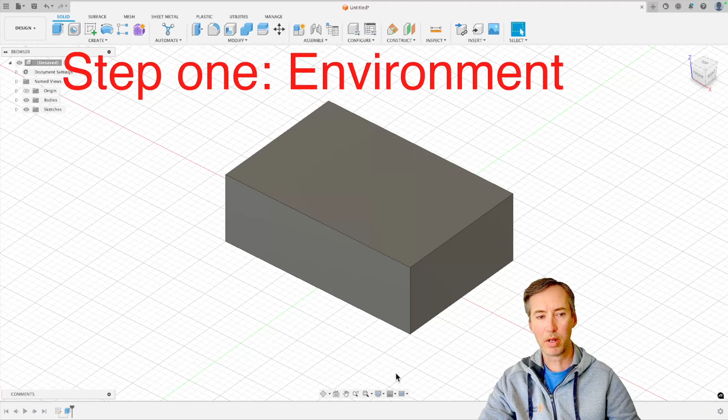Whether you're a new user or a seasoned user of Fusion, I have 7 settings for you that are going to make your life better. First, we want to make Fusion look less like this and more like this. So the first thing we're going to look at is the environment. That's the background color up here. If we look down here, we have our display. I'm going to go to environment. I prefer gray room for this.

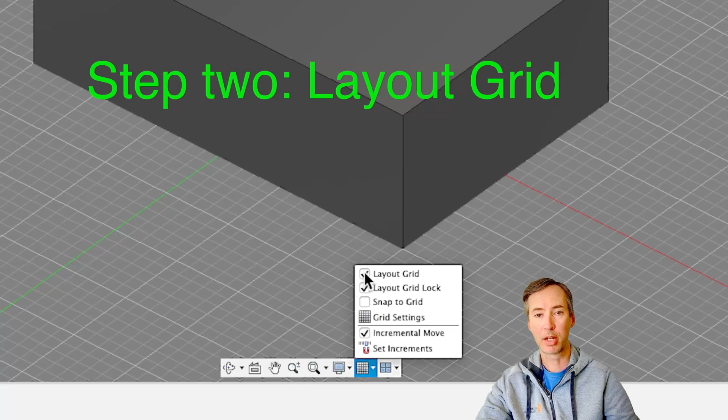Second thing I want to look at is the layout grid. So if we come down here to the grids and snaps and just uncheck layout grid, to me that's a much cleaner look. And that grid isn't really helping us.

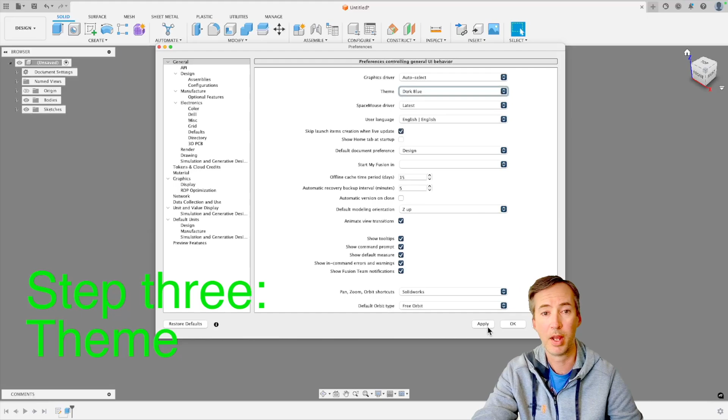The third thing is the theme, and that's the elusive dark mode. So let's check that out. If we go into preferences, the first thing you're going to want to do is come to preview features. In the future, if you're watching this, this might be a default enabled thing, but currently this is a preview feature. So you got to find UI themes and turn this on. And then if you come up to general, the theme, you want to set dark blue and then apply and OK.

The fourth thing is component colors. So if we come up here to utilities and select display component colors, this will give really nice colors to all of our components, and each component will be a separate color, which makes it really easy to see everything.

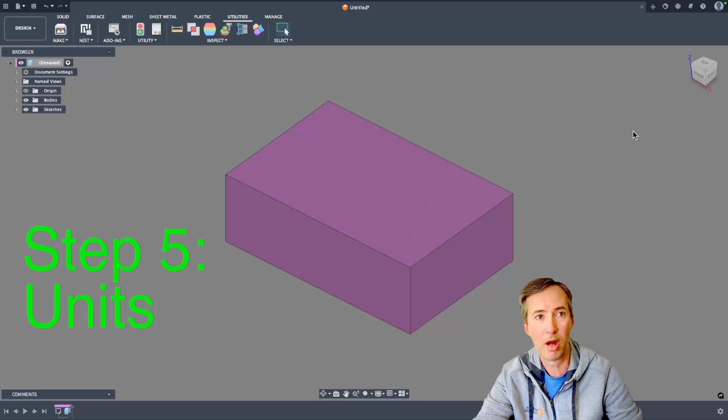The fifth thing is units. If you've been using Fusion for a while, you probably have this figured out already. But if you're a first-time user, we want to go again into preferences. And then we have default units for design, manufacture, simulation. So if you're in the US like I am, you probably want these all set to English or inch units.

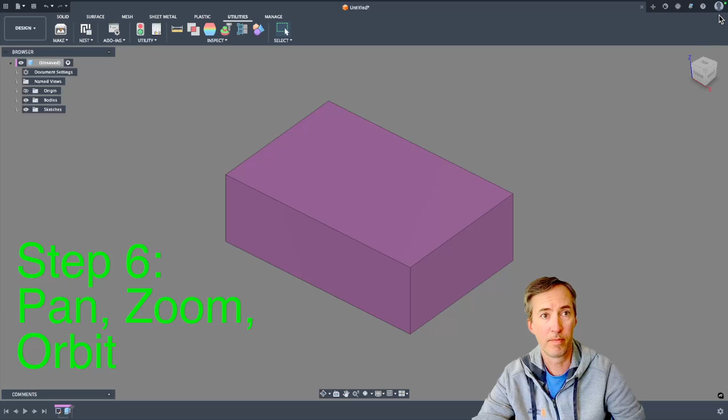The sixth item is our pan, zoom, and orbit controls. So again, we're going to go into preferences here. And this is going to be in general. If we scroll down, pan, zoom, orbit shortcuts. So you can choose what you like. I prefer SolidWorks because it's the most standard, and it works just like SolidWorks. It works just like Mastercam. So if you're coming from any of those other softwares, this is going to be totally natural for you.

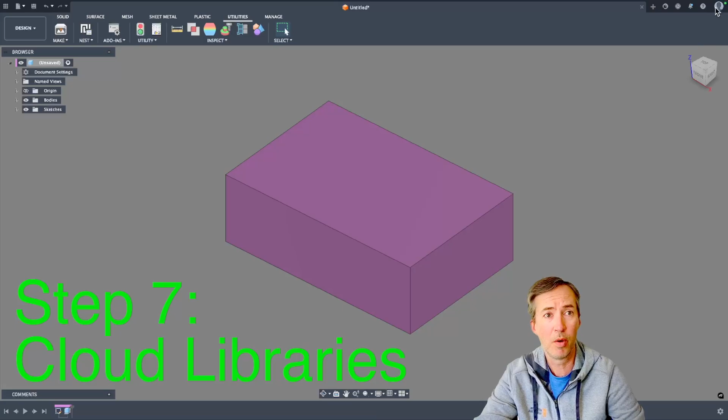The seventh and final item is cloud libraries. So if we again go into our preferences, we want to look for manufacture here, and click enable cloud libraries, apply and OK. Cloud libraries allow you to save tool tables, machines, and all those kind of things in the cloud so you can use them at any computer. This seems like it should be a default and an obvious thing, but it's actually kind of not obvious, and it's really nice once you have it turned on.

So I hope these settings help you guys.